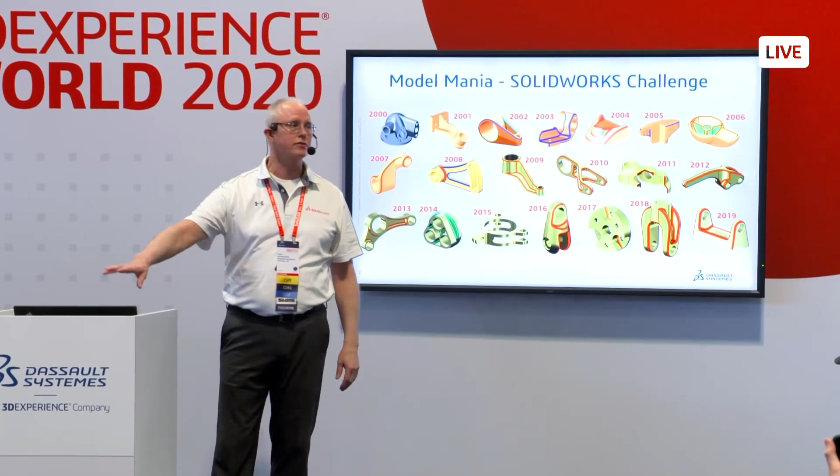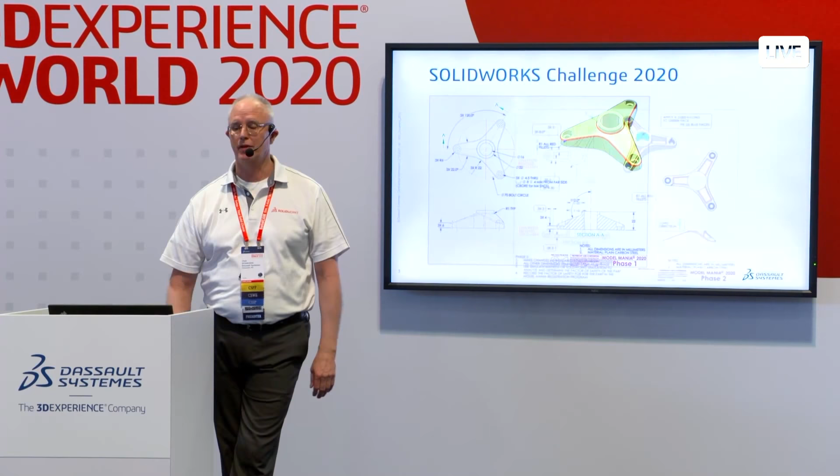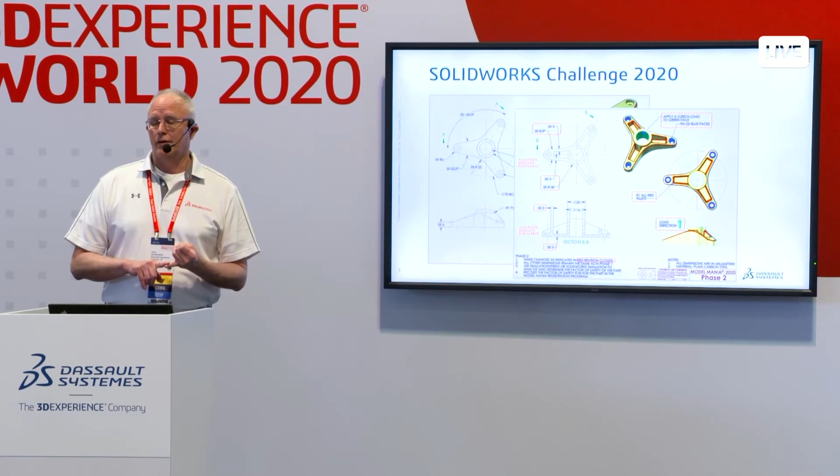For Model Mania 2020, as I said, you sit down and you model a part. We give you a drawing that looks something like this, and then we ask you to make a change to that. So all those changes are highlighted in those bubbles. So you'll make a change to that part, run a quick simulation on that part. It's graded on accuracy first, and then it's graded on time. So whoever gets the part done fastest is the winner.

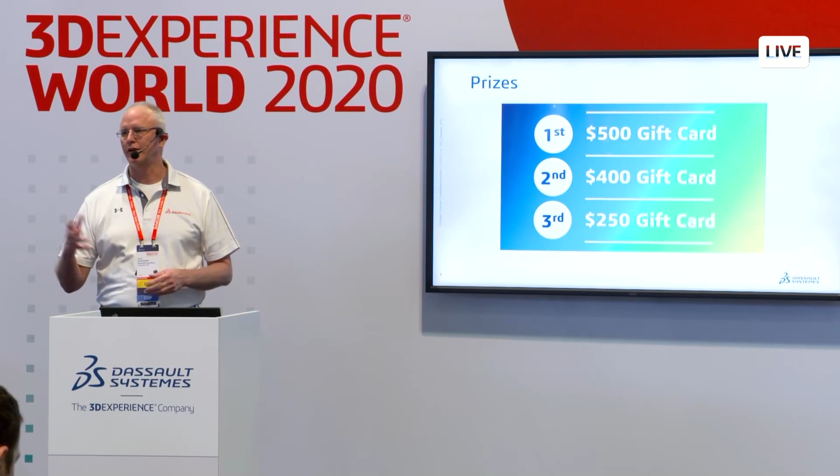So what do you win? We had some really great prizes again this year: $500 gift card, $400 gift card, and $250. So first, second, and third. Resellers compete against resellers, and our users compete against our users. So we'll give six prizes for the Model Mania SolidWorks challenge, and six prizes for the 3D Experience challenge as well. Without further ado, we'll go through the winners.

So I'll announce the winners. If you're here, come up on stage over here by Michael, and then we'll actually run through a solution of how you can actually model it and make the changes. So start with our user champions. In third place, Eric Snyder from ECCO Block.

I have a son named Eric Schneider. It's spelled different, but no relation.

Congratulations. Cody Laughlin from Edgewater Automation. Come on up if you're here, Cody. Yeah, that's good. Okay. Congratulations. And our first place champion, Noah Clark from Lincoln Electric. Come on up if you're here. His time was 16 minutes, 21 seconds. He was the fastest overall, faster than the reseller champion.

So let's talk about our reseller champions. In third place, Guilherme Kastner from SKA in Brazil. Come on up, Guilherme. Second place, Rodney Harper from CATI. And our first place champion for the resellers is Boss Kuman from CADMES with a time of 16 minutes, 59 seconds.

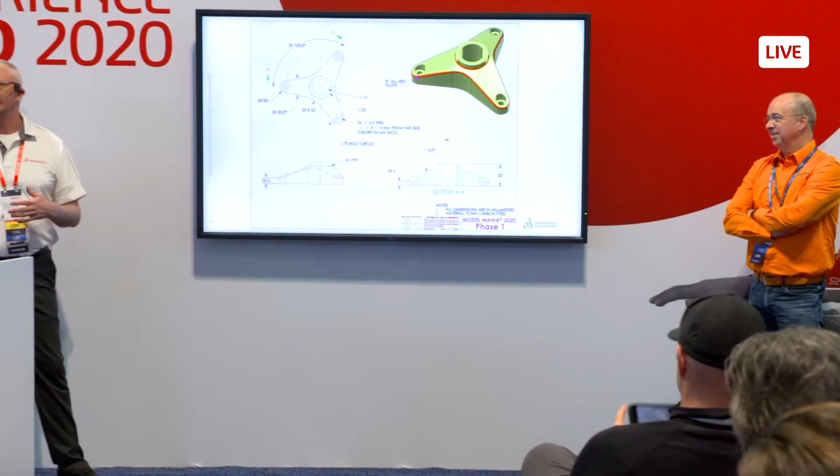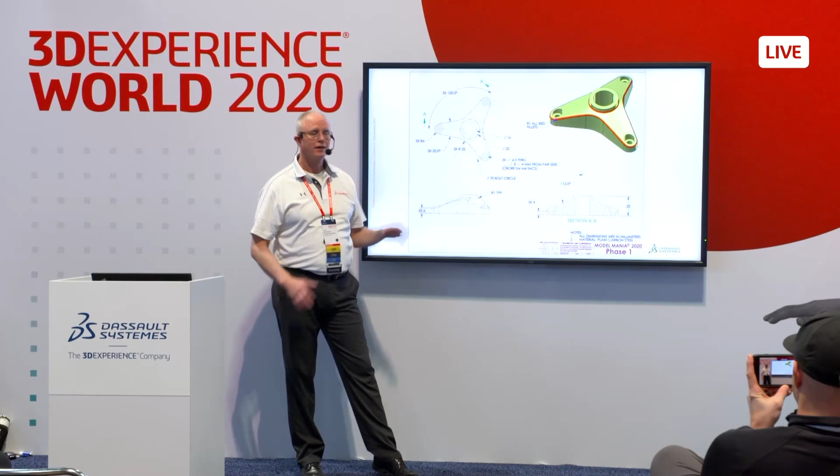All right, so I'll run through a solution of how you can do this. It was really interesting this year to see the variety of methods and techniques that people chose to build this part. Some people started with the cylindrical boss here. Some people started with just this arm and then extruded from there. Some people drew everything into one sketch. All different kinds of ways to do it this year. It was really interesting to see how they did it.

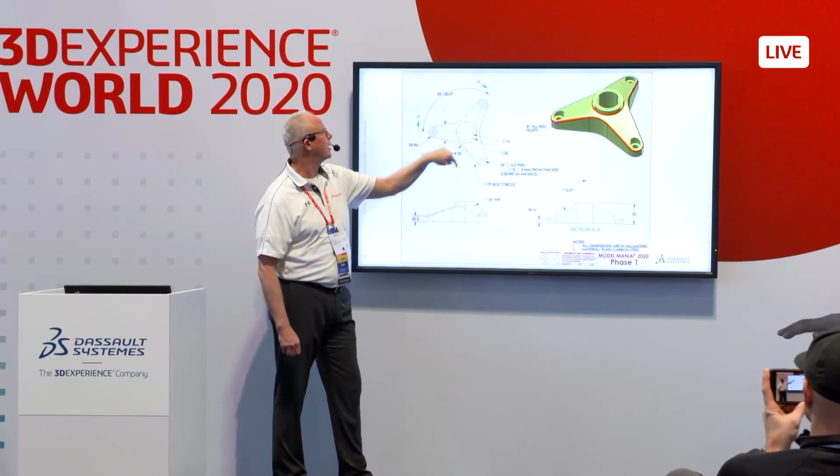So if I look at this, I always think the main part of this thing is that centerpiece. So that's where I started, on the centerpiece. A lot of people started with just drawing one of these arms and patterning it around. So we have some dimensions here, the 22 degree angle on this, but if you notice, it's not picking up tangency. So we're going to need to figure out how to terminate that back there. This 22 millimeter dimension in here is one that we need to keep track of. And then we have this sloped face here.

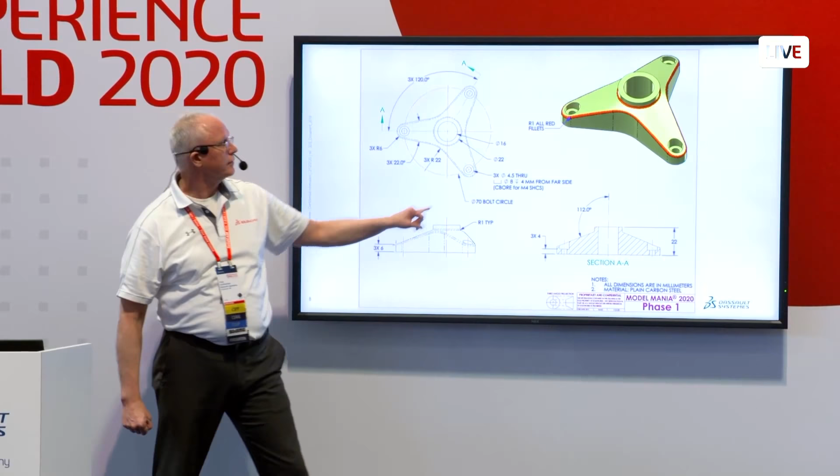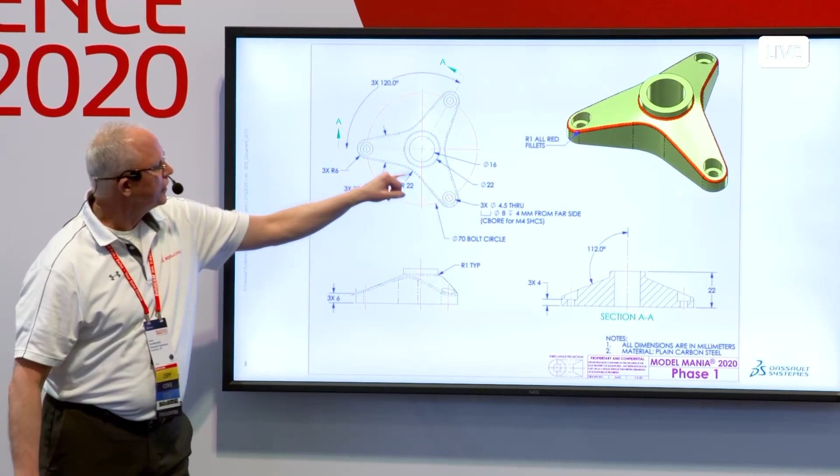So if you look at this, that's all one surface. That's actually a conical face that's defined by this 112 degree angle. So if you think about this, if I draw this in there, how high do I extrude this arm up here? You're going to have to extrude it up to there. So we'll walk through how we do that. So let's get started here.

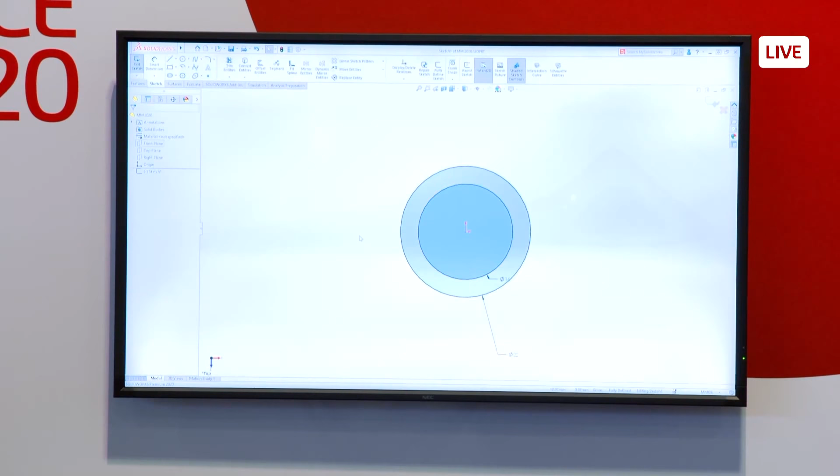All right, so we're going to start on the top plane. As I mentioned, I thought of that central portion of the model as the center of my model, so we'll go ahead and draw a couple circles in: 22 millimeters, 16 millimeters, and then I'll add another construction line. I like to use construction lines, it's a visual tell that this is horizontal.

We'll add another circle, draw a line that's tangent off of that 12 millimeter circle, and then we'll terminate that, but I'm not quite sure where to terminate it yet. We'll mirror it to the other side, and the way I'll do this is we'll add our dimension of 22 degrees.

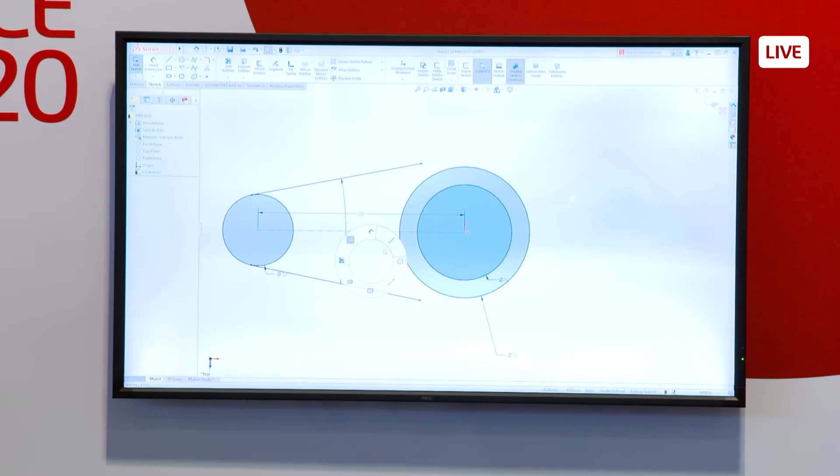And then I will just draw a vertical line in here so that comes down, and I'll add a relationship to make that a midpoint relationship. So my sketch is fully constrained. Now I'm going to go ahead and extrude it.

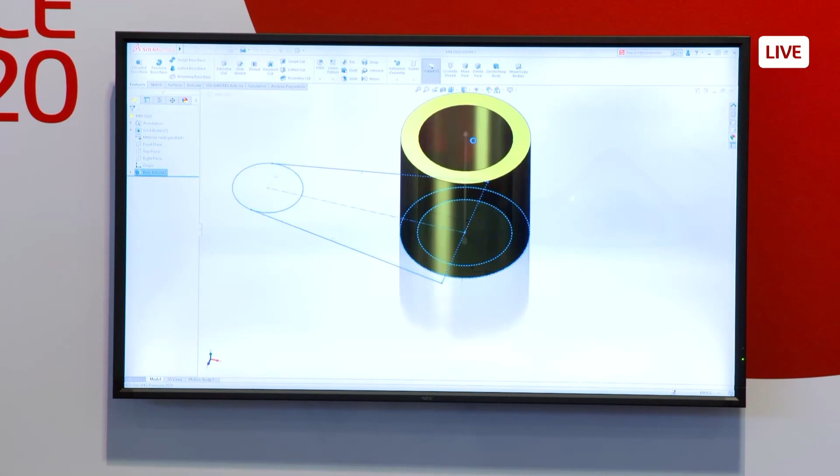I'm just going to grab 2 of these contours right here, both of those, and we'll just drag this up to make our 22 millimeter height for that cylindrical boss there. There's our first feature. We will turn on the sketch again so we can reuse some of the geometry in that sketch.

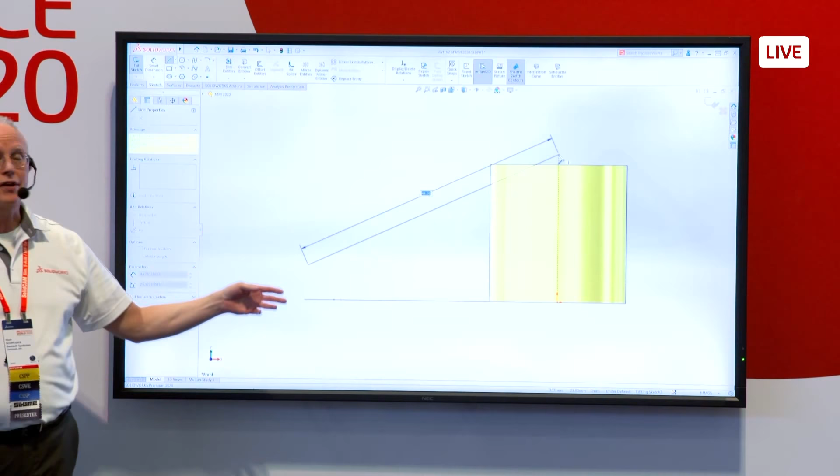But as I mentioned before, how am I going to do this? How am I going to terminate that feature when I bring this up here? So I said I'll go on the side view here and draw in a line and revolve that around as a surface. So now I have something to extrude up to. Some people extruded it up and then cut away. All those things work, this is just my method for doing that.

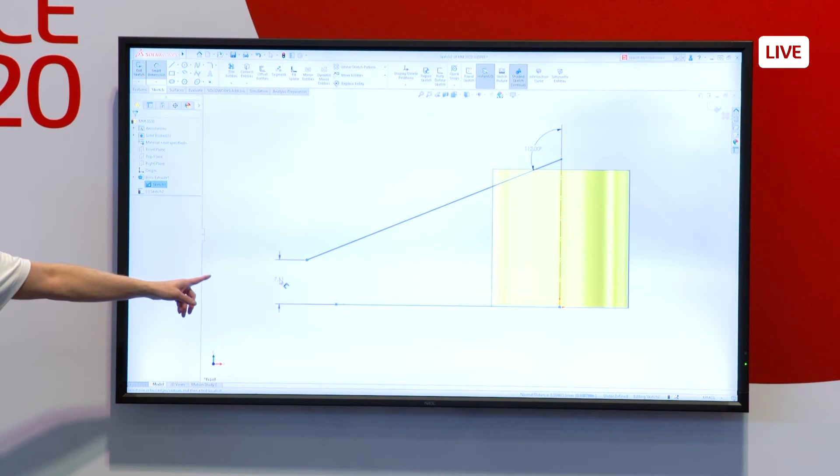Edit our dimension, so we'll add a dimension at the bottom. That's got to be 6. But how do I terminate this line here? The way I did that is I just drew in a construction line, just drew that down vertical, and then...

I'm going to add a pierce relationship between the endpoint and that circle, so that always locks my sketch down. I know if the length of that arm changes, my angle sketch there will change as well.

I'm going to do a surface revolve, we'll just revolve that around. You can see how that looks there.

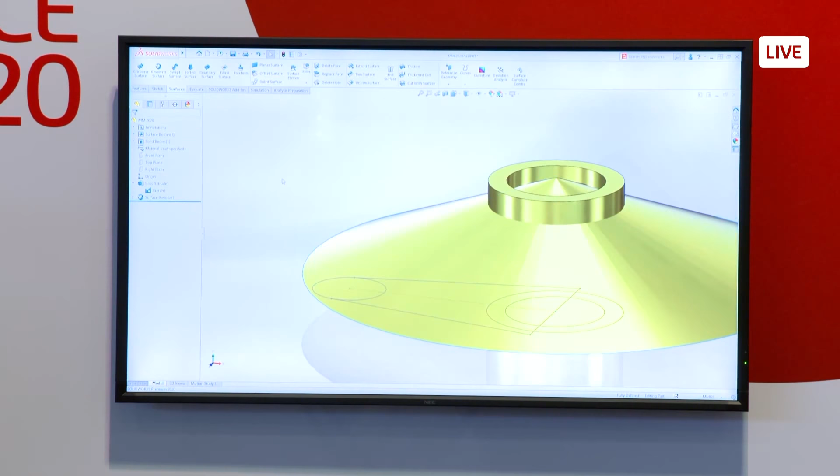Now we'll take that sketch that we previously created, and I'm going to extrude that. We'll use some contours here, just grab a couple contours and extrude that up. I don't have to worry, since I'm working on this same model, about combining and doing multi-body stuff here, this will all be a single body. Tab key, I can use the tab key to hide that surface there, and that goes away.

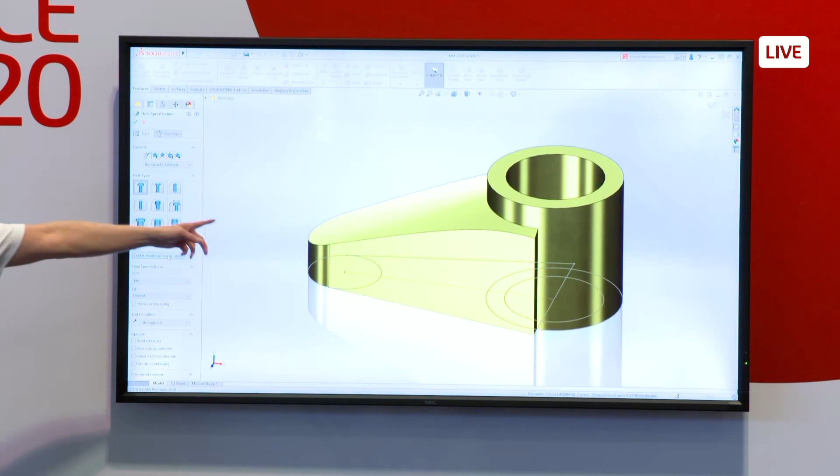Now we're going to put these counterbore holes in there. So this is an M4 counterbore hole, and I'm going to place that right on that top face of the cylindrical body. And I'll go ahead and position that, but that's not the right size. I want it to be 4 millimeters from the bottom.

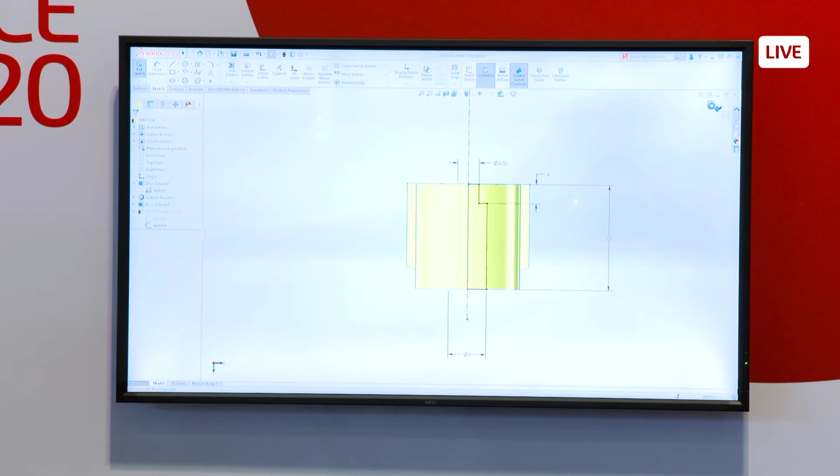So these sketches inside of the Hole Wizard are editable. So I'm just going to go into that sketch and move that extension line for that dimension to the bottom and make that 4. Could have changed the dimension, could have done all different kinds of things, but those sketches are editable, and you can make those changes very easily.

We'll hide our sketch, and we'll take these 2 features and pattern it around three of them equally spaced. So those, we now have that.

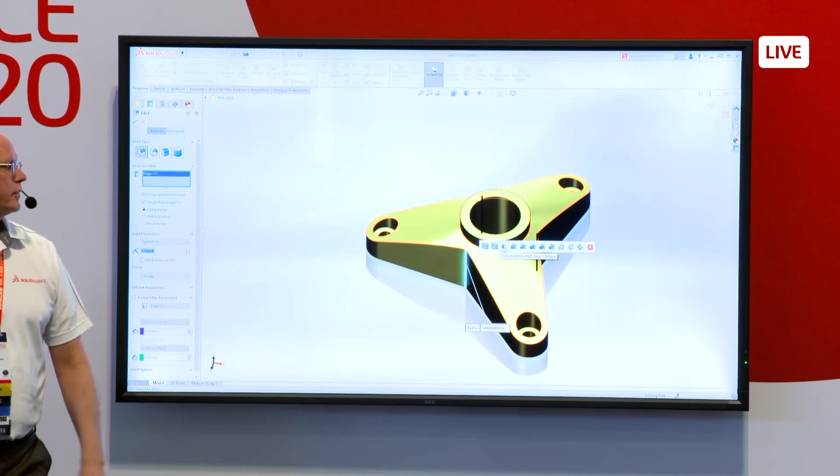The next thing we need to do is put those 22 millimeter fillets in here. So I just use the selection helper here and just grab all the connected faces that go along with that, or the similar edges that go along with that, and make that 22 millimeters.

And then we need to put those 1 millimeter fillets that wrap all around everything. Just choose 2 edges here and it takes care of everything for us.

I like to add a little color to those. It helps me visualize how this fillet actually runs. As I make changes, I can visually see how that works.

So there's phase 1, everything's done.

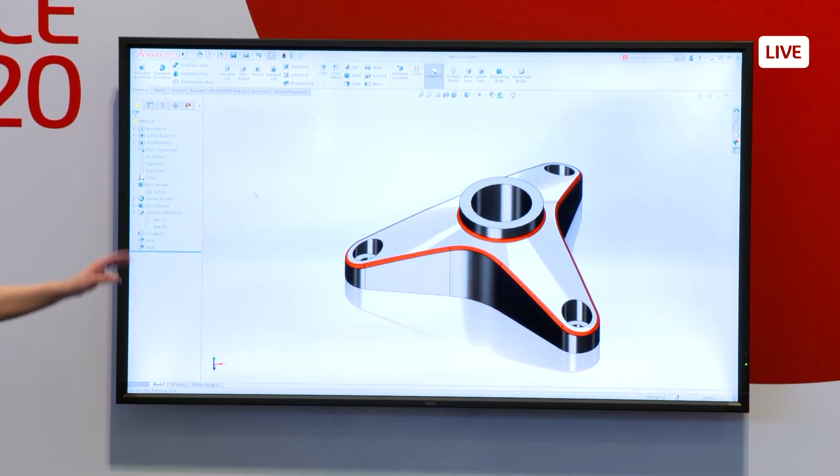Pretty straightforward there. This thing's making noise. I think I'm breathing into it. Sorry.

Okay, so here's phase 2. We give you this, you're done with that, we give you this drawing. Everything that's in red, you got to make changes. So let's take a look.

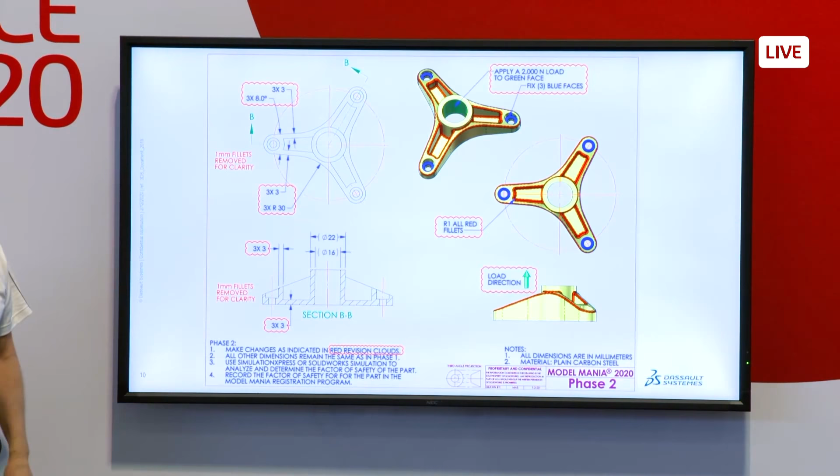3 by 8, so all 3 of these arms now go from 22 degrees down to 8 degrees. I see 3, these are all offsets. I see a 3 offset there, a 3 offset there, so it kind of tells me maybe I can shell that, I can shell those out to get that to work.

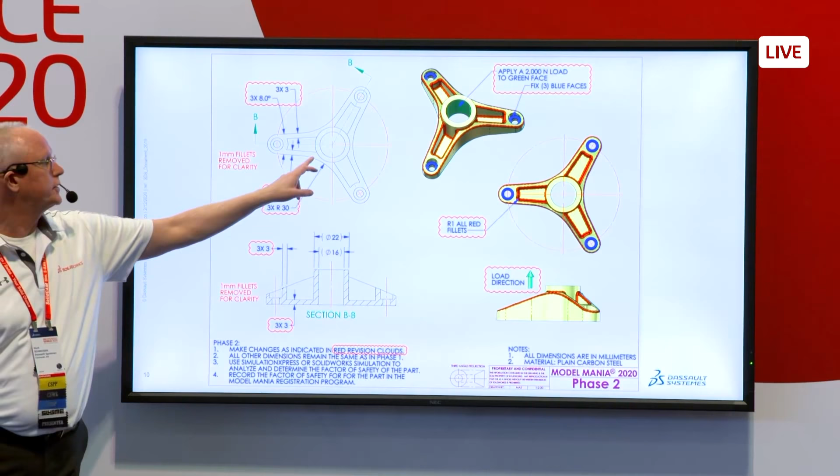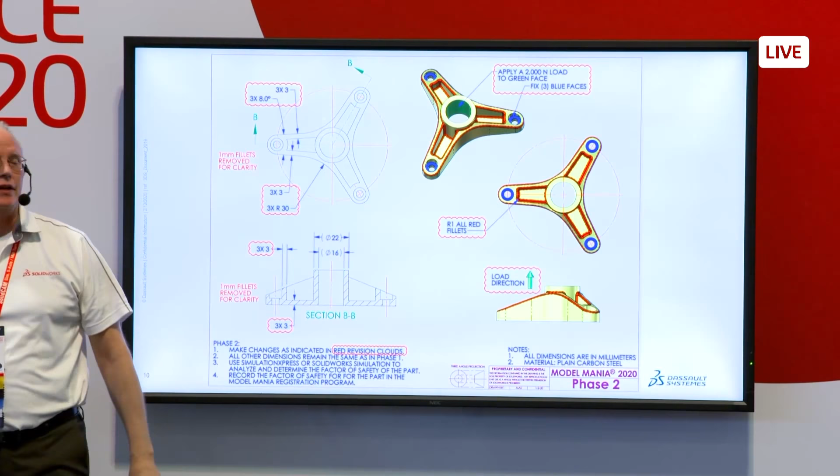And then the other thing is this radius change here, so I got to change that to 30. Got to redo some fillets over here. We'll redo our fillets, and then we're going to apply a load here and hold these blue faces and run a simulation to get the factor of safety. Here's the load directions called out. So let's see how we approach that.

So first thing I'm going to do is I'm going to go back into that feature, and I'm going to change that from 22 degrees down to 8. That went pretty well, no problems there, no problems.

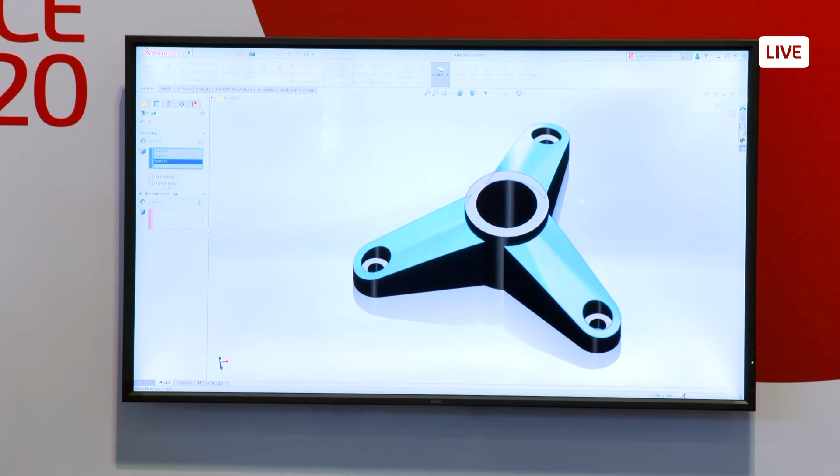But I got to do that shelling that I talked about. Get those offsets in there, however you want to, however you created that. We'll do a 3 millimeter shell. Turn our preview on, that looks about right, that's going to be pretty good there. So that went pretty well, pretty easy too.

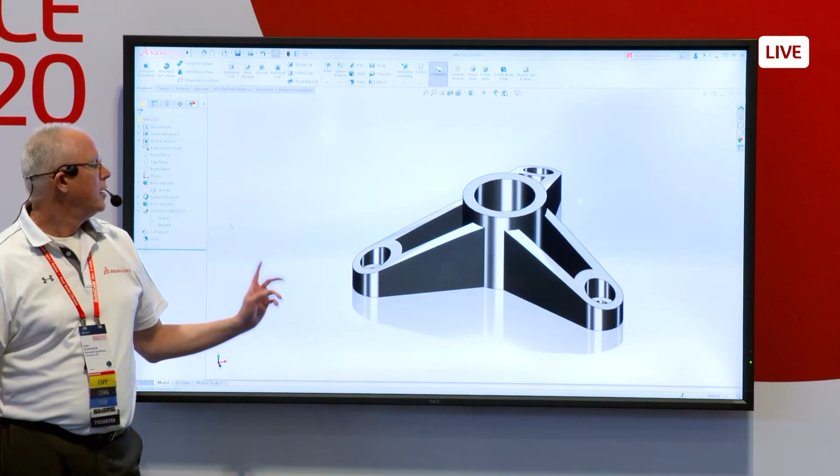Now we're going to come to those big 22 millimeter fillets. So if you look at how that 22 millimeter fillet was there, I can't really just put that back in there, I don't want to model material back in there. So I'm just going to suppress that, I don't want to work with that one anymore.

To swallow this face here, I'm going to use a face fillet. The face fillet will allow me to choose those 2 faces, and it'll create the fillet across there. See how that works? Hit the Enter key, fillet command comes up again. Choose 2 more faces, I get another 22. Choose 2 more faces, get another 22. Face fillet, whenever I think I have to swallow a face like that, I always think face fillet.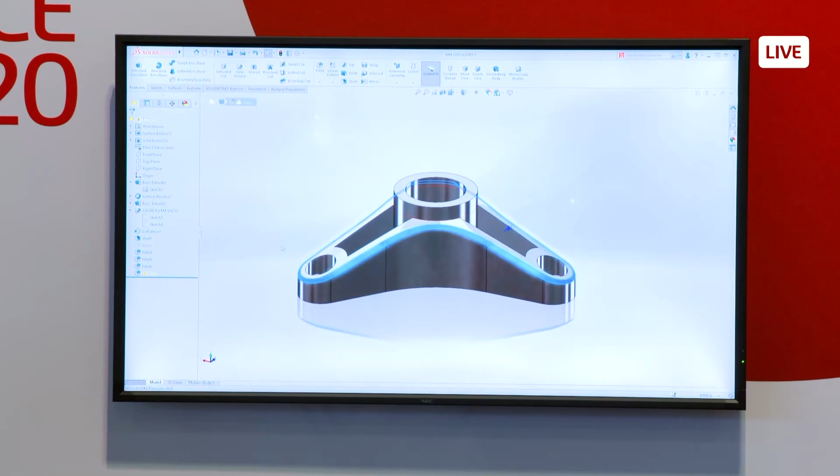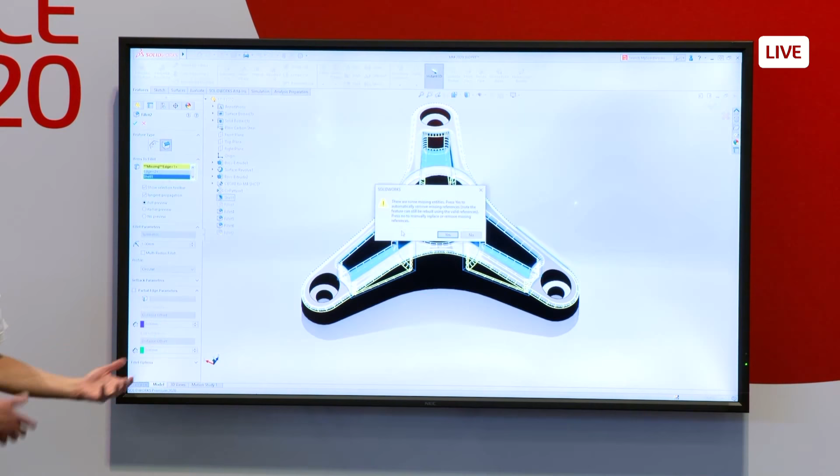And then our 1 millimeter fillets, I got a missing edge, I get it, no problem. Instead of trying to go grab all those faces or edges, I'm just going to fillet the shell feature. When I fillet the shell feature, it fillets everything, but this fillet I don't want. So I'll just use delete face command and delete that one fillet off of there, and then I have my part, the geometry for that part's all done.

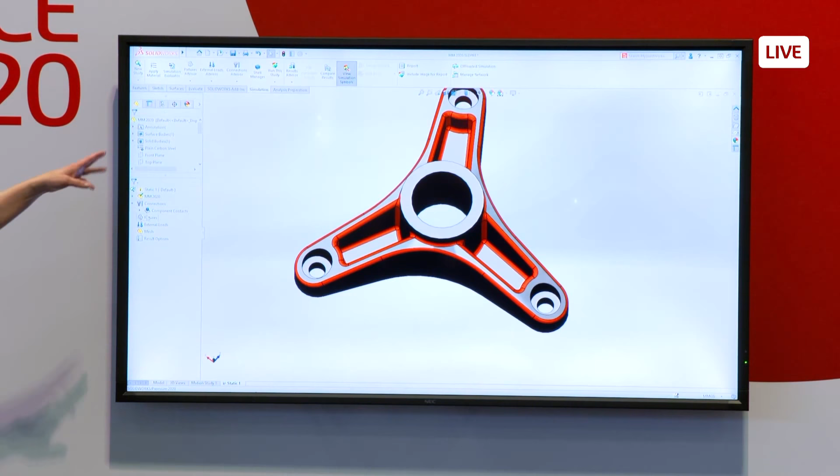The next thing we need to do is run our simulation. I like to use, you can use SolidWorks Simulation or Simulation Express. I like to use SolidWorks Simulation. We ask you to hold those 3 planar faces from the counterbore hole. So we'll go ahead and grab those 3.

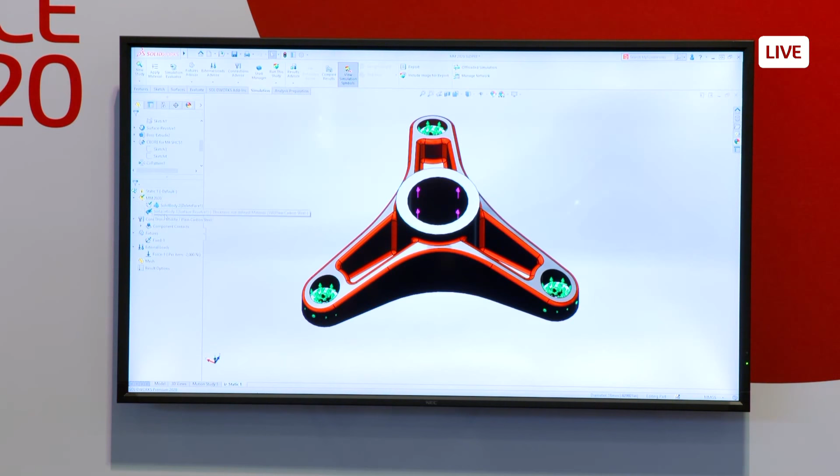Then we'll add a force to that central cylindrical face there and provide a direction. I don't want it to be normal, I want to provide a direction there. Just use an edge for the direction, and I'll put the force in of 2,000 newtons. And in this case, from the icons, I can see I need to reverse the direction. Force is applied, all I need to do now. Oh, I need to, since I am using multi-body and I didn't delete body, I have to exclude that surface body from my simulation so it doesn't bark at me and say I don't have material defined for it.

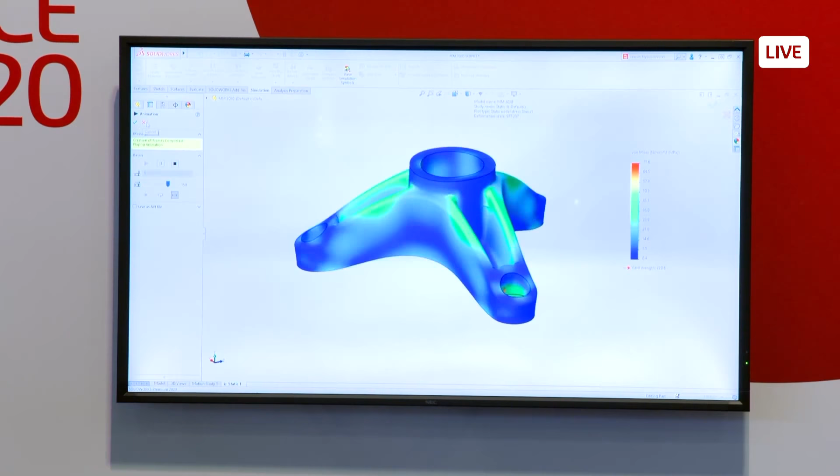So next thing we do is we run our simulation, we get a stress plot. I always like to animate this to see if it's behaving as I expected. That helps me understand whether or not I have applied my loads and boundary conditions properly. And then we ask for what's the factor of safety. Factor of safety is 3.1, somewhere around 3. So if you got there, you're one of the champions.

So that's Model Mania 2020.

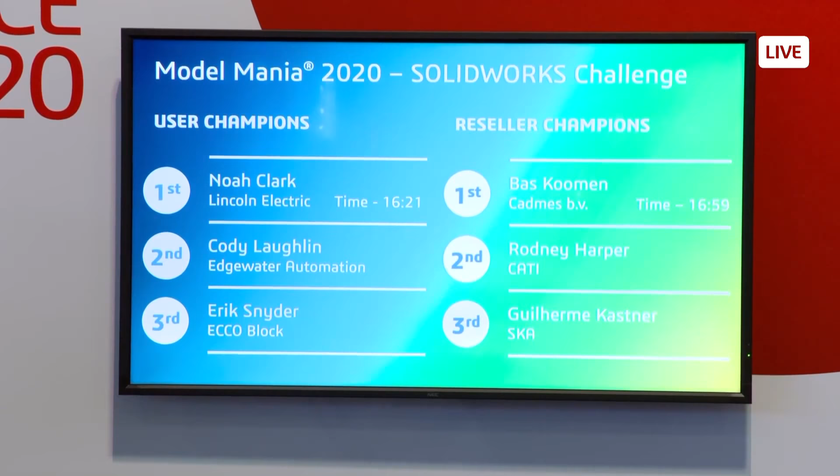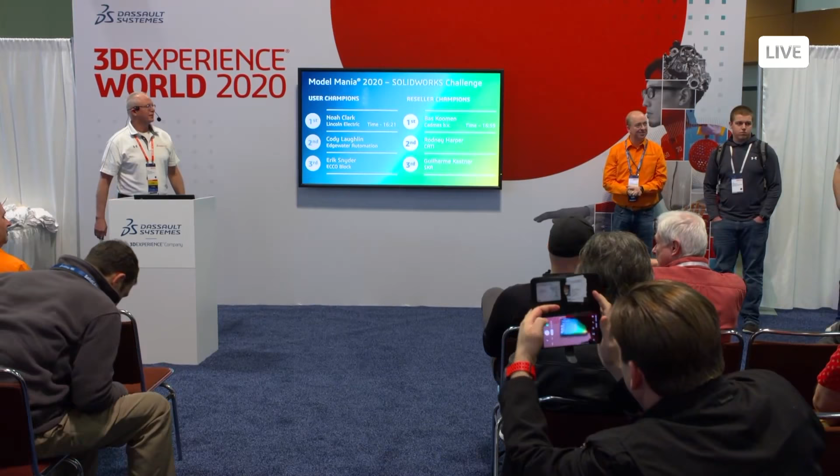So I'm going to turn it over to Michael, and he's going to run through the 3D Experience Challenge. Mark, my hands are sweaty. Every time you take me through Model Mania, I get those nerves again. Like you got a problem, my friend. I do, it's stress, I'm not the only one.

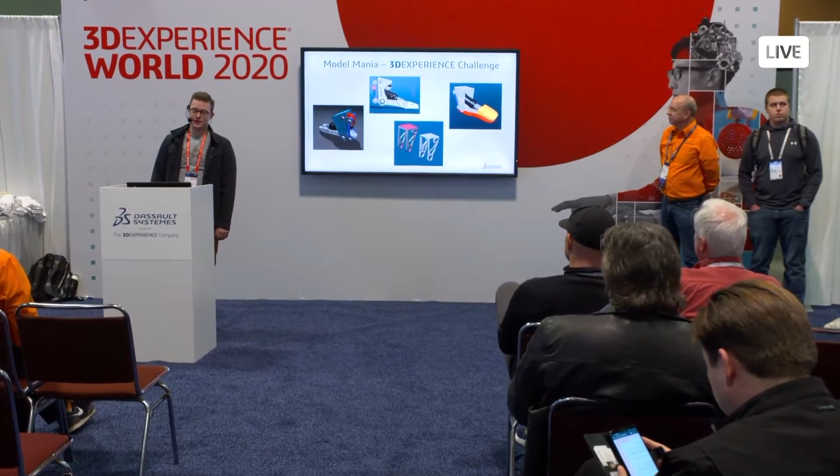So we expanded Model Mania this year, like Mark mentioned, by introducing the 3D Experience Challenge. Here you can see the honorable mentions of some of the things you guys created. Way to go, man.

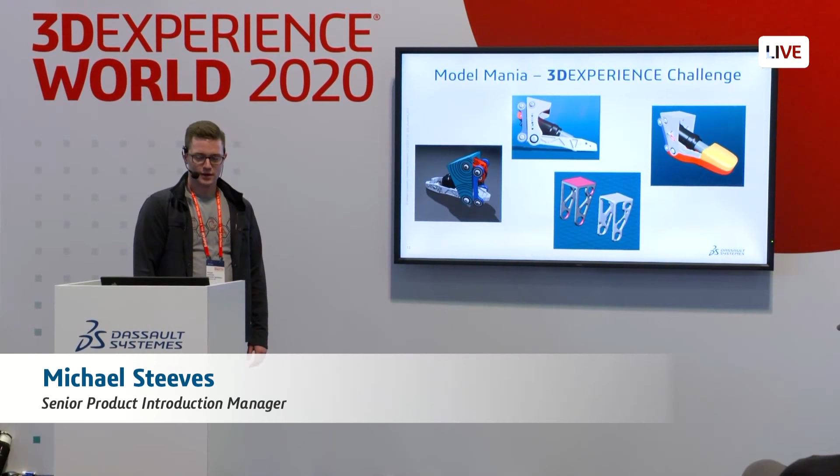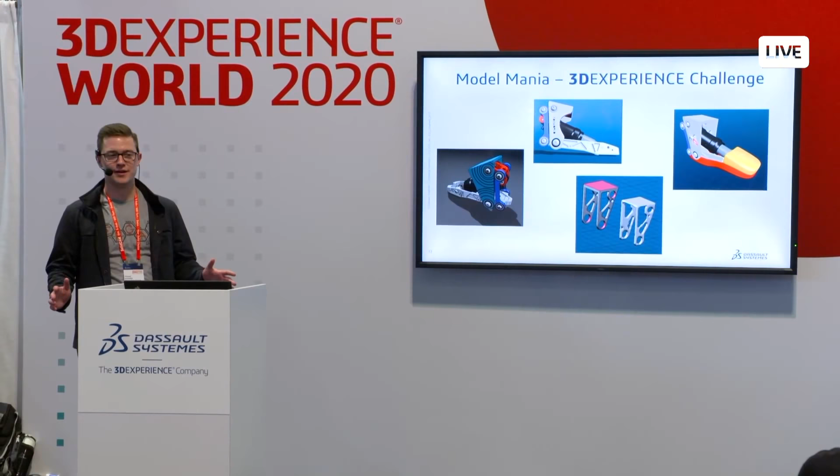What is the 3D Experience Challenge? We'll take a look at what the workflow looked like, but I wanted to make this stress-free: walk up, sit down, have some fun with some of the roles on the 3D Experience platform. So we used a couple apps, XDesign and XShape, and modeled up a part.

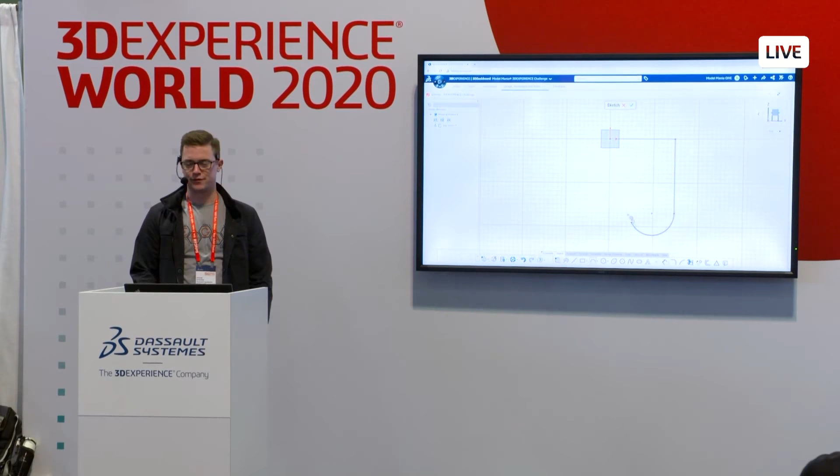I had a basic drawing up there for you to go through some basic sketching, basic extrudes, create a cut. But then from there, it was up to you. You were able to create whatever you wanted associated with this BioDapt VF2 foot.

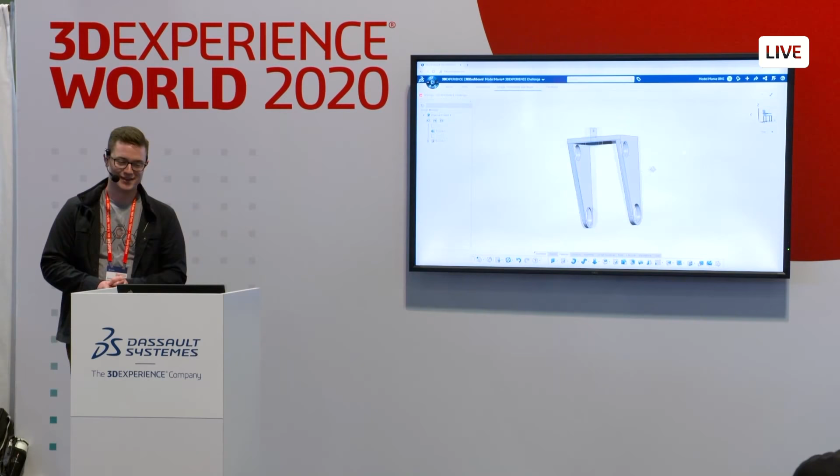So we made this little bracket, and you can colorize it, put some color on it. We had this pre-built assembly for you that you can bring in, check out the mating in XDesign, check out the assembly motion.

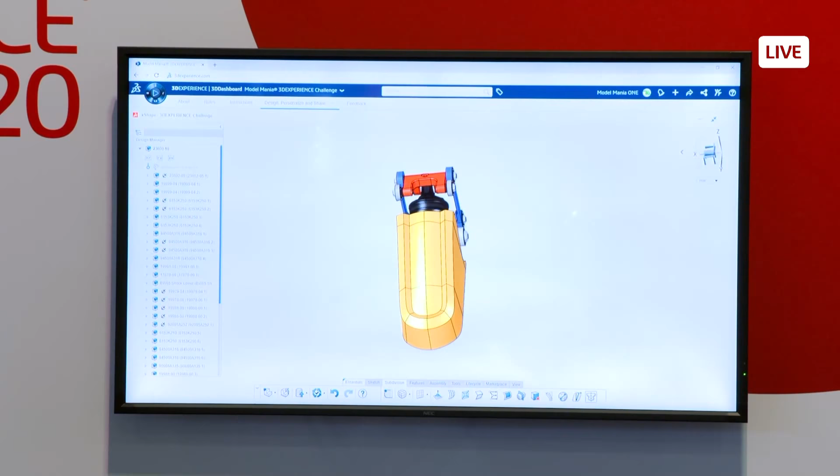And if you wanted, the choice was yours, you could use XShape, and just hitting X on the keyboard does an app switch, so you don't have to close or reopen anything to get into some of that sub-D modeling. Here you can see some other examples.

From there, when you were ready, we published it to the 3D Experience World community. This is the same community we used this morning in the general session for voting. While you're in there, you can take a look at all the submissions of everybody at 3D Experience World.

What's really cool, I'm going to save my winners to the end because I want to show you how I'm able to vote here. Because what this ended up being was kind of a popularity contest. All these posts went onto the 3D Experience World community.

And you shared your post. Not only was it visible to everyone there, you were able to take a link unique to your post and put it on your Facebook, your Twitter, your social media. I even saw a couple people out last night at the party pulling up each other's posts and giving each other likes.

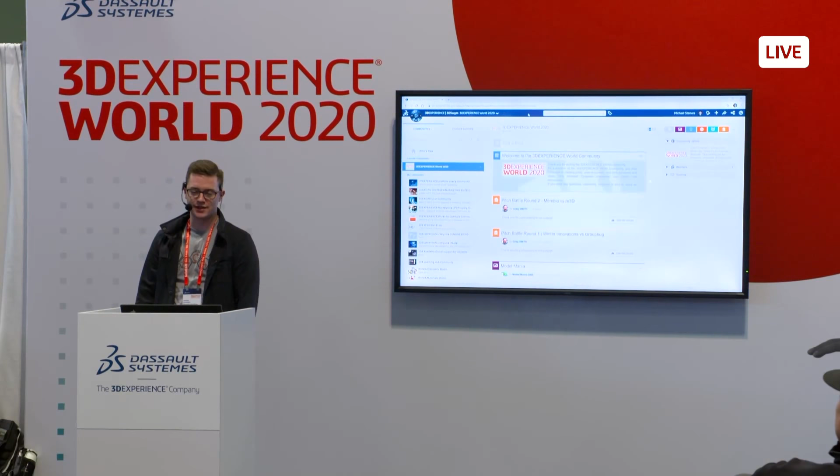So you can take a look at this now. Go to solidworks.com/3DXW20, that'll take you to the community. You can use the search right at the top, put in Model Mania, and that gives you all the posts filtered together.

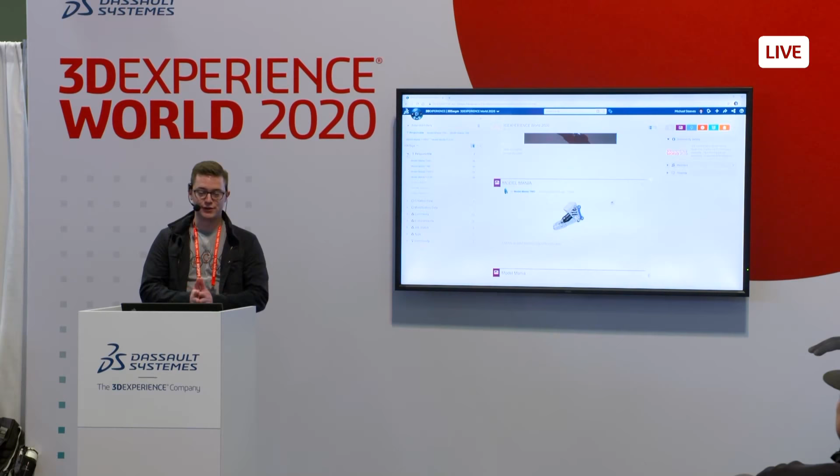What's really powerful here, it makes my job really easy to grade this and pick out the winners, is since we used four unique accounts, I can just filter all the posts for those four accounts. Go into endorsements, these are our likes, and there's our most liked posts.

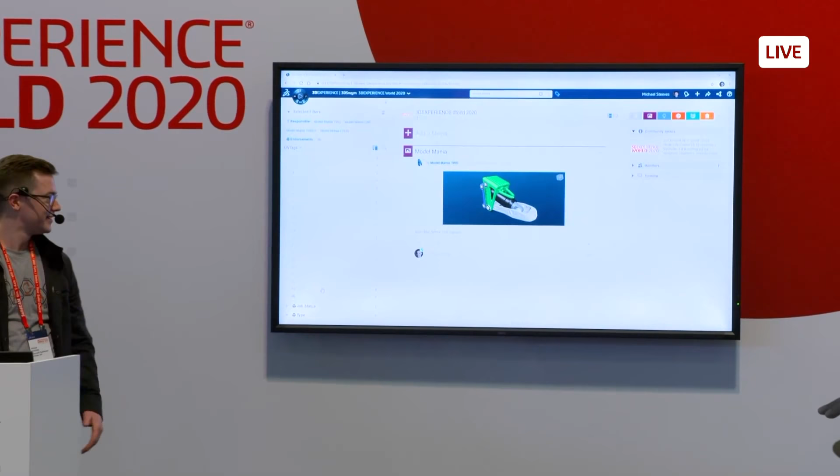John, hold the applause, I'll announce in a second. Give a little teaser of who got first place. So yeah, the most liked post was right there, and you can see all the different varying number of likes and engagements. I thought it was a great use of the platform. Made my job easy, Mark.

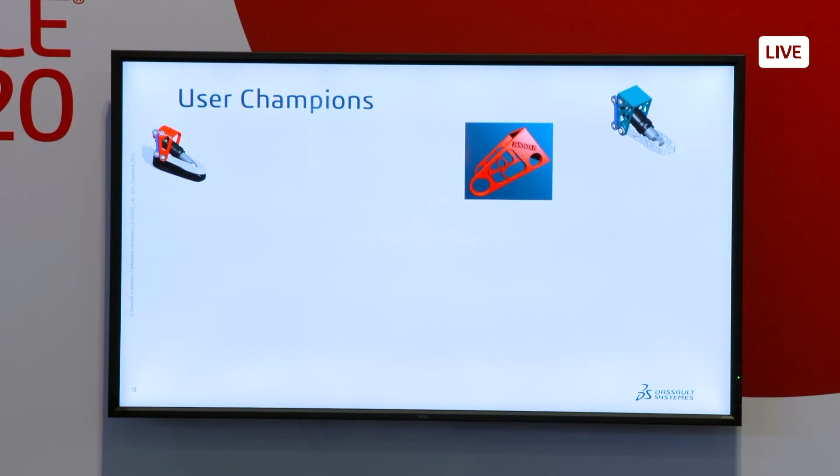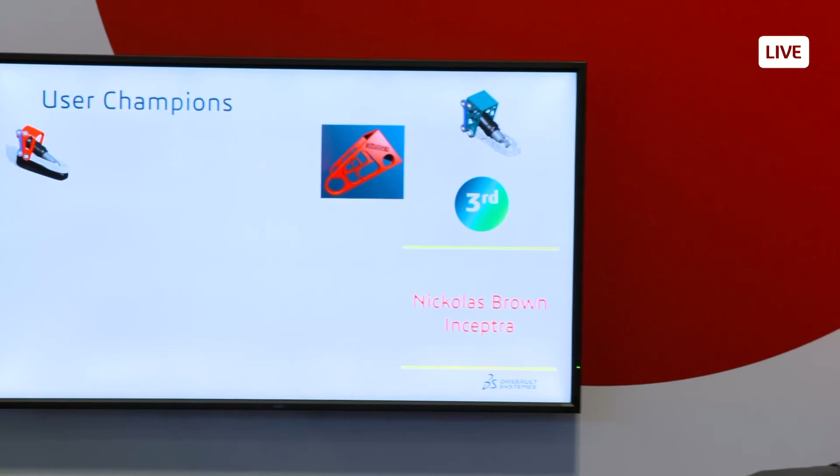All right, so let's take a look at our user champions. In third place, Nickolas Brown with Inceptra, if you're here come on up. Second place, Lynette Frey, Northwest Community College. And in first place, Amy Hamilton, Sleepy Hill Middle School.

It's very cool to see, I'm getting emotional too, Amy. It's very cool to see the effort you put into this, because you were telling me your story and being able to share this with your community. Awesome, it's awesome. Okay, reseller champions.